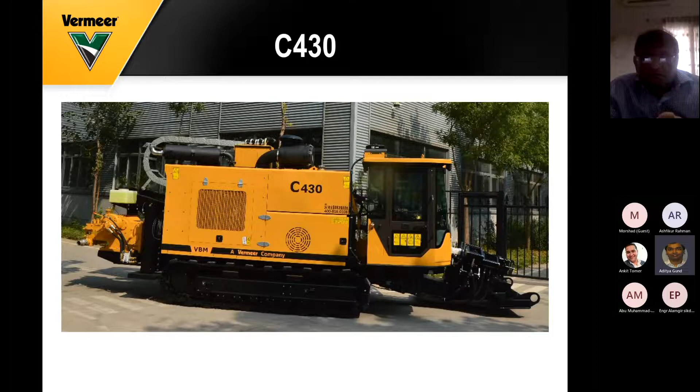In today's webinar, we would be focusing more on a couple of our HDD models which are more suitable for pipeline applications, pipeline projects. One of those is going to be the C430. That's the model we will be looking at first. So this is how the machine looks like.

The markets which can be served with this machine are basically categories up to 300 meters, or even longer than that for short distances like electrical installations, or in old infrastructure in cities in countries like Bangladesh, India, where a lot of old infrastructure is getting updated. This can be used for those projects, or even new infrastructure installation like water projects, gas pipelines, and sewer projects. So this would be an ideal machine for that sort of projects.

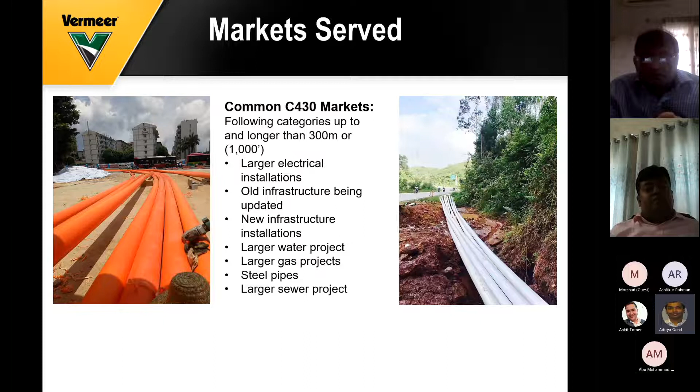If we look at the specifications of the machine, you can see the total length, width, and height of the machine on the screen. The main factors that matter for any machine are maximum thrust and pullback force. For this machine, it will be 43 tons of thrust and pullback, and the torque has 3 speed torque rotation settings.

If you are operating on the low speed shift, then you have 11,400 Newton meter. If it is on medium, 7,600, and if it is high speed shift, then you have 5,741 Newton meter of torque.

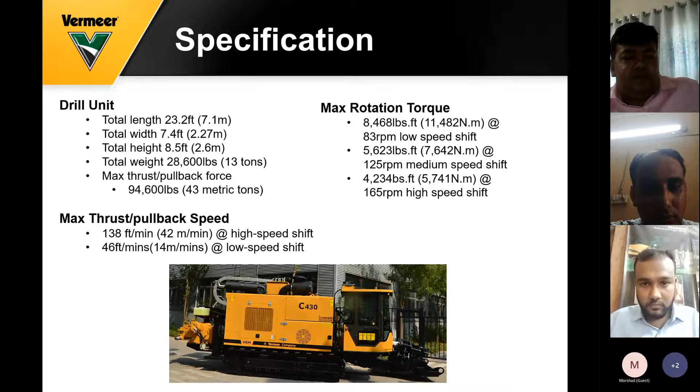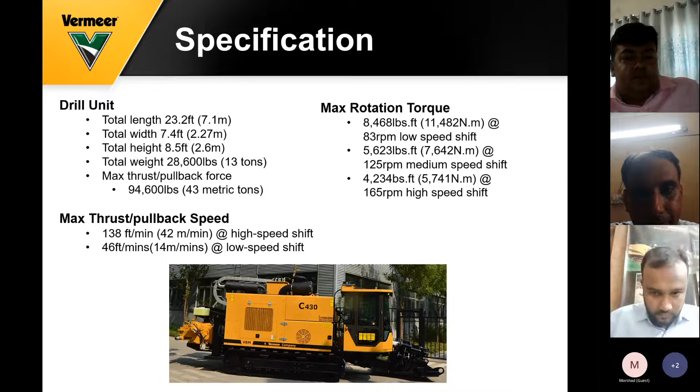And the speed of thrust and pullback is almost 42 meters per minute. That's basically the speed of the carriage which moves from the back end of the machine to the front. It is equipped with a 205 horsepower Cummins engine, and there is an onboard mud pump which you see here on the machine, with two options.

The one you are seeing here is 460 liters per minute. We also have recently launched an option with 650 liters per minute, those are from a brand called LEIKE. And there is a fuel tank of 313 liters, and a hydraulic tank of 460 liters.

In drill rods, there are two sizes that we offer: 73 millimeter and 83 millimeters. We have not sold the 73, but the 83 seems to be a very popular size for drill rods. The length of each drill rod is 3 meters, and we give you a package of machine and 100 rods, so along with the machine, you will have 300 meters total drill rod length.

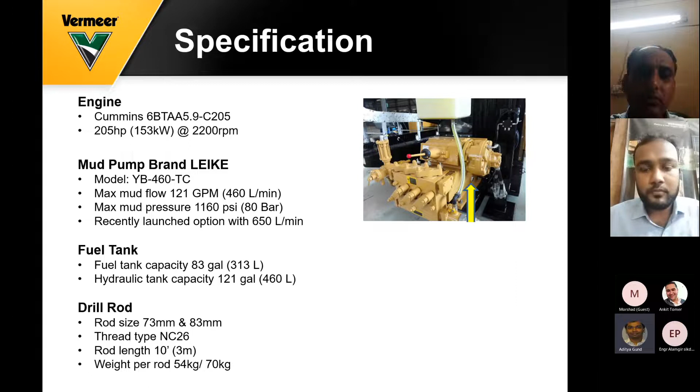The machine is equipped with high performance piston pumps. As compared to our competitor machines, those offer higher reliability. They are designed to operate at a system pressure which is lower than the max rated pressure of hydraulic components in the machine, which basically makes sure that your machine life is much higher.

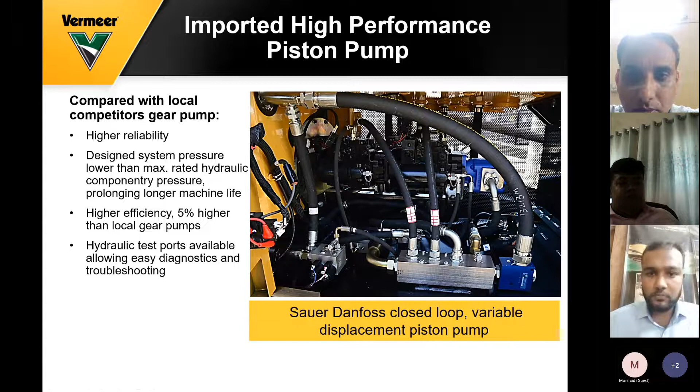They operate at much higher efficiency as compared to the local gear pumps, and there are a lot of hydraulic ports given on there, which basically allows your service crew for any diagnostics and troubleshooting they're doing at the site. As you can see here, these are all Sauer Danfoss branded closed loop system, so that is one of the advantages for C430.

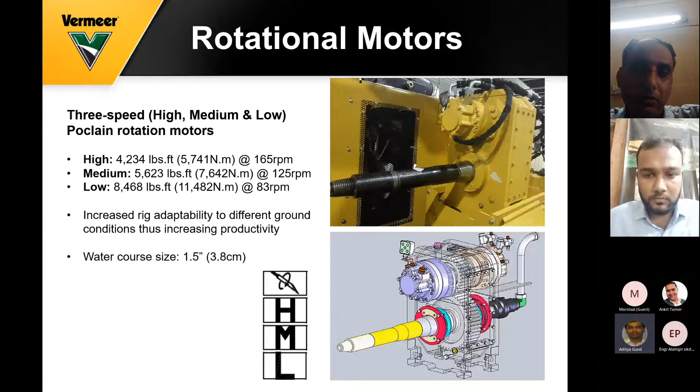The rotation motors are three-speed Poclain rotation motors, and they have three different speeds: high, medium, and low. At different speeds, there is a torque that either increases or decreases depending on the speed at which you're operating. This basically helps your machine have adaptability to different ground conditions. If you're working in harder ground conditions, you operate the motors at slow speed so you get more torque. If it is softer ground conditions, you operate at higher speed since you don't require very high torque. So that's the advantage of having three speed rotation motors.

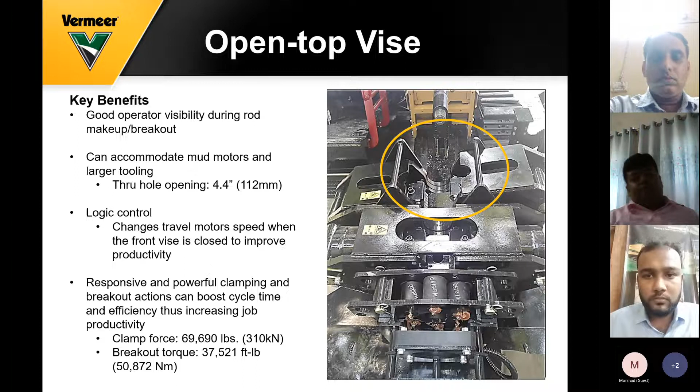The clamping force is much more responsive and powerful as compared to competitor machines as well. So that's basically about the Vise design.

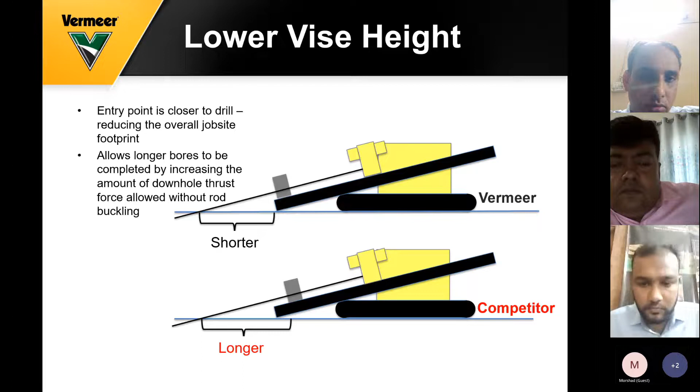One important factor that sets apart C430 from competitor machines is the entry point of the machine is much closer to drill. This angle is much more acute as compared to other competitor machines, which reduces your job site footprint. You are positioning the machine at a much closer distance to your entry pit, so there you are gaining some on the footprint. At the same time, it also allows you to do longer bores by increasing the amount of downhole thrust force as well. So this is one of the advantages of C430 as compared to competitor machines.

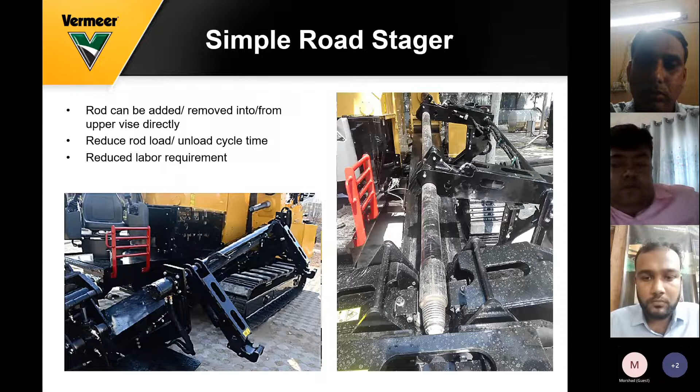The machine has a rod stager option. As you can see on this picture, these are the two arms in which rod can be added or removed from the vise directly. This basically eliminates human interference there, and your loading and unloading of the rod cycle time is much lesser. Obviously your labor requirement is reduced as well.

Ankit, can you allow those people?

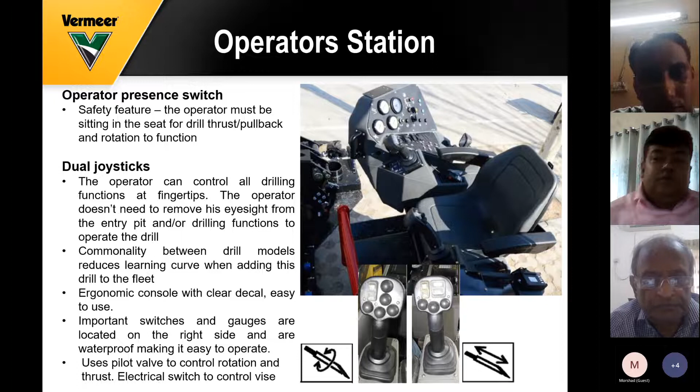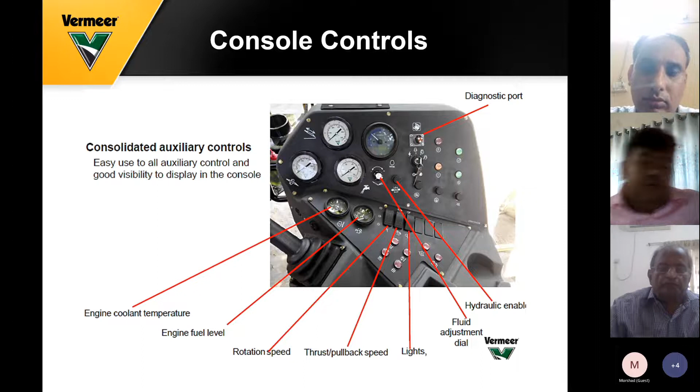That's how the operator station looks like. All the controls are on the right side - machine ignition, all the gauges, thrust and pullback, rotation speed, all the operations of these functions, all the switches, everything is located on the right side of the machine. So the operator can be looking at the drill rods and Vise, and he can also monitor all the functions at the same time. He does not have to look at the left side or anything like that.

Another thing is called the VC tool diagnostic software. We have our own software which basically helps our engineers understand what the problem might be and how to diagnose it.

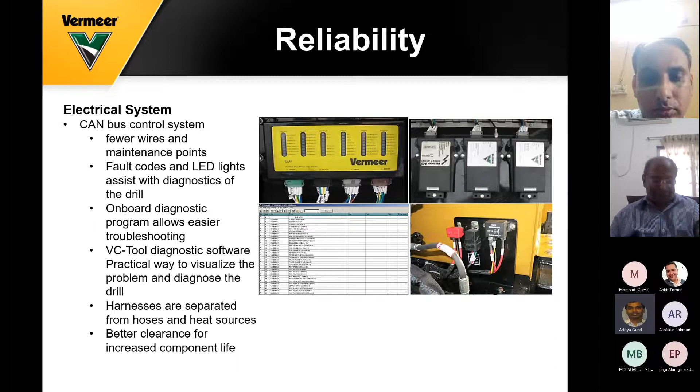And for all the electrical harnesses, we make sure the harness routing is done in such a way that they are separated from hoses and heat sources, so everything is away from the heat sources with better clearance, which increases component life.

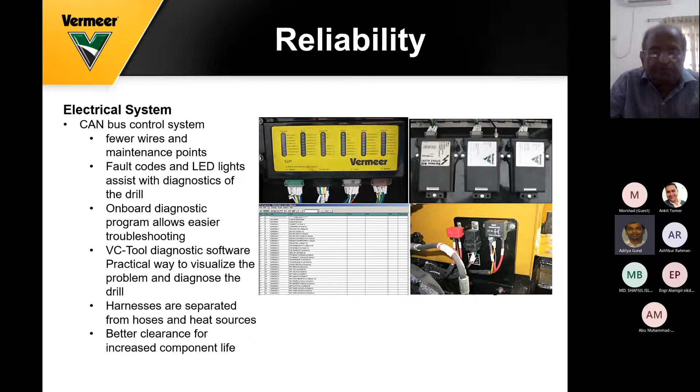Recently we have launched one more feature in the C430 called the plus one control system. It's kind of an upgraded control system with improved reliability and efficiency. It basically allows the machine to process commands faster and allows smoother operation.

A very interesting thing here is there is an option for rock drilling or auto drilling function. These two options were there in our other machines, but C series machines did not have them before. Now they are also equipped with this auto drilling or rock drilling option, which is one more additional advantage compared to our competitor machines.

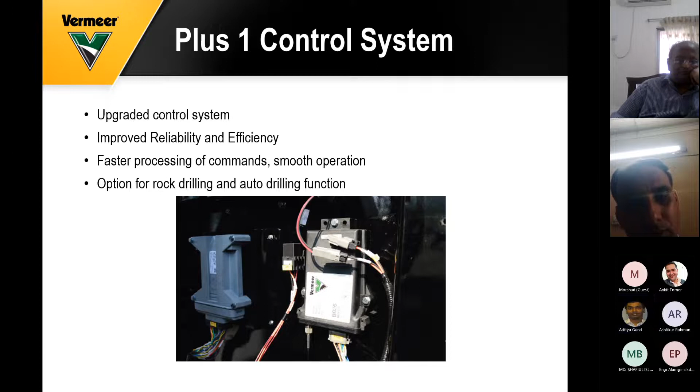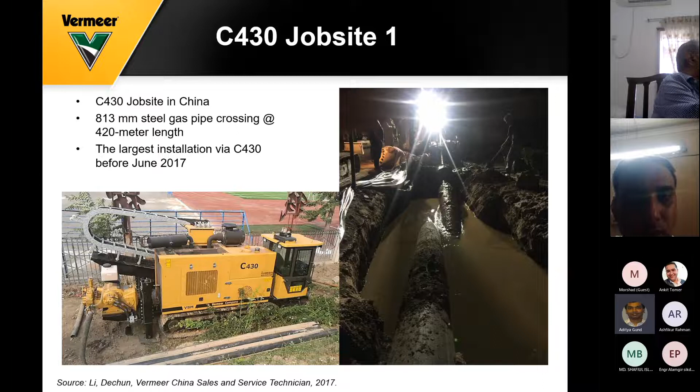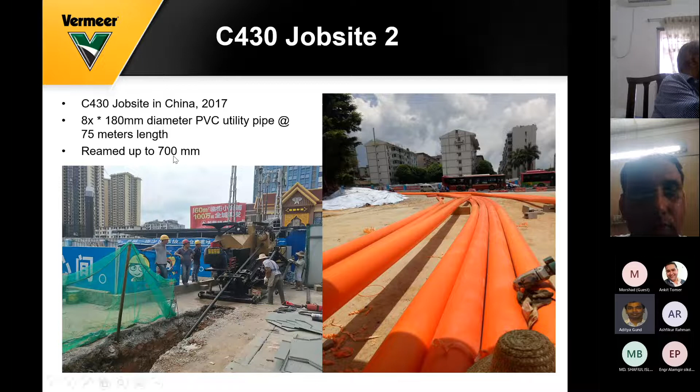There's another one here, again from 2017. They pulled eight different ducts of 180 diameter each. It's a PVC utility pipe, and the length was around 75 meters. So the length was not that high, but the reaming had to be done all the way up to 700, which is almost 30 inches.

From a user experience standpoint, there's a lot of operator comfort, because these pipeline jobs require much longer duration compared to smaller OFC jobs. The operator is actually going to be with the machine, operating it for much longer than on a smaller project. So we made sure the operator is comfortable, and if the operator is comfortable, productivity increases, and thus you make more money because your productivity is going to be much higher.

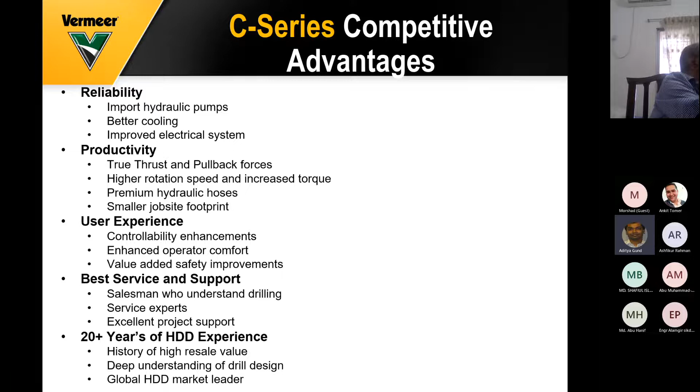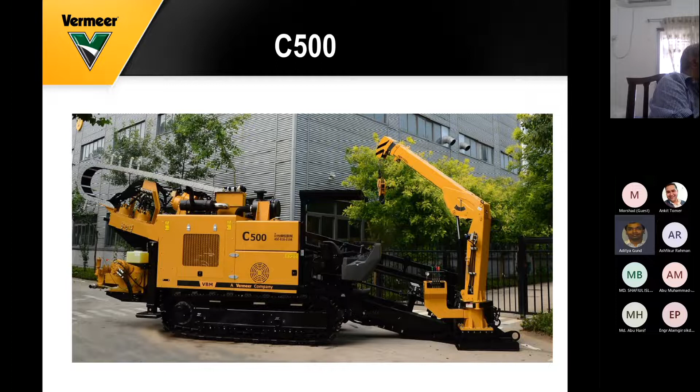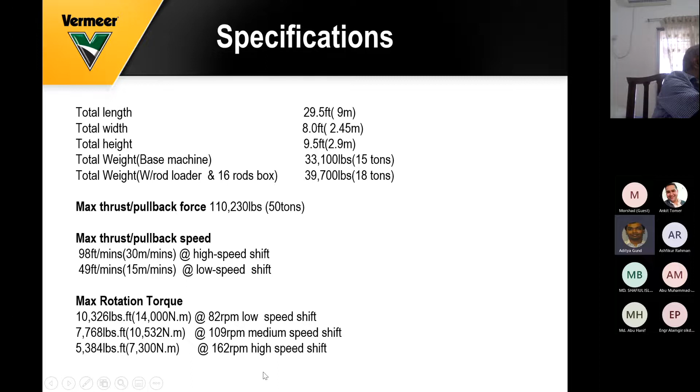Let's go through the specifications of this machine. It's almost 9 meters long, 2.5 meters wide, and 2.9 meters in height. It weighs about 18 tons with the rod box. Thrust and pullback is 50 tons, and carriage speed is around 30 meters per minute at high speed. We use 3-speed rotational motors, so at lower speed you get 14,000 newton meters of torque, and at higher speed 7,300 newton meters of torque.

This comes with a 240 horsepower Cummins engine. We use Cummins engines on all our machines.

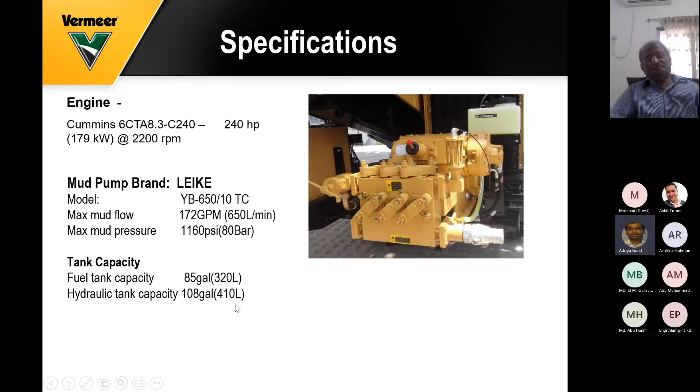This is equipped with an onboard mud pump, 650 liters per minute, 4-gear manually operated. You can choose what gear you want to operate the mud pump at. It has a 320-liter fuel tank capacity and 410 liters of hydraulic tank capacity.

The rods are 89 NC31 thread type, 4.5 meters long. In the C430 there are 3-meter rods, but in the C500 we provide 450 meters of rod with the machine, which comes with 100 rods totaling 450 meters.

This optional crane has a 2-ton capacity, which can be used for lifting rods, reducing your labor a lot.

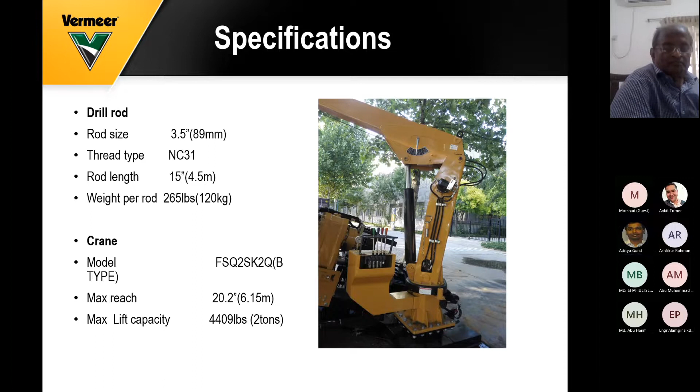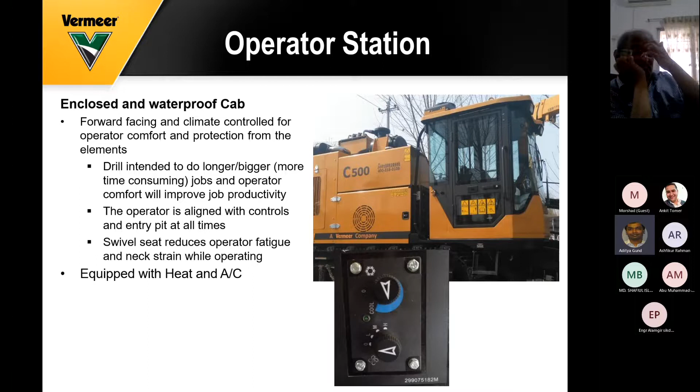This is how the operator station looks. It's forward facing, unlike the C430. The operator faces this side, with a completely glass panel here. The operator sits here with the controls right in front of him.

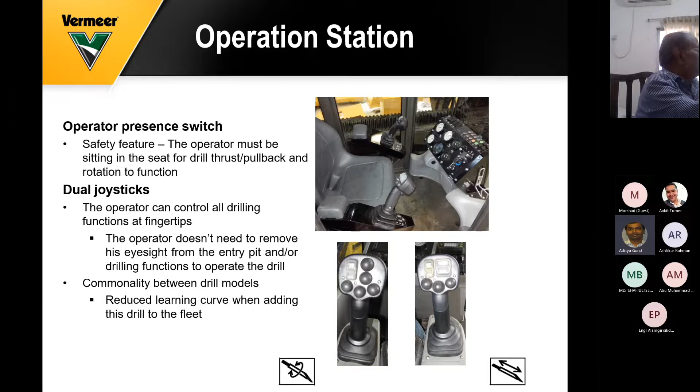These are the two joysticks, similar to the C430. All the controls on the C430 joysticks are also on the C500 joysticks. There is a safety feature on the C500, also present on the C430 and all Vermeer HDD machines, called the operator presence switch. This means the operator has to be seated in the operator station for thrust, pullback, and rotation functions to work. The joysticks allow the operator to control all drilling functions at his fingertips on this machine as well.

This also comes with the open top vise design. I've already mentioned the benefits of that, including much better operator visibility. It can accommodate mud motors up to 127mm diameter. We have been supplying 127mm mud motors with the C500, and we've sold machines in India where those mud motors are working fine with this machine as well.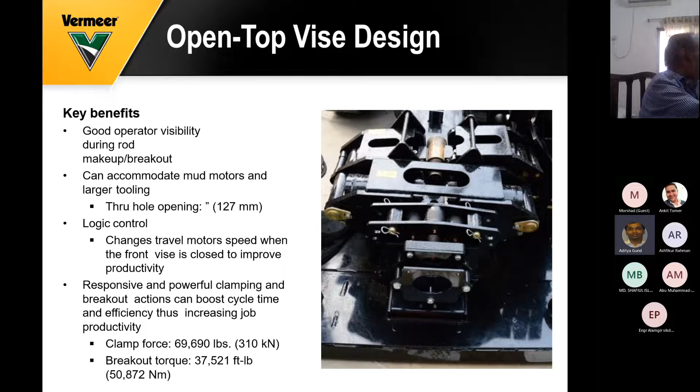This is how the rod loader looks. The machine comes with a rod box that can hold 16 pieces of rods, and the remaining rods have to be kept on the ground. There is a crane that can be used to load the rods into this rod box as well.

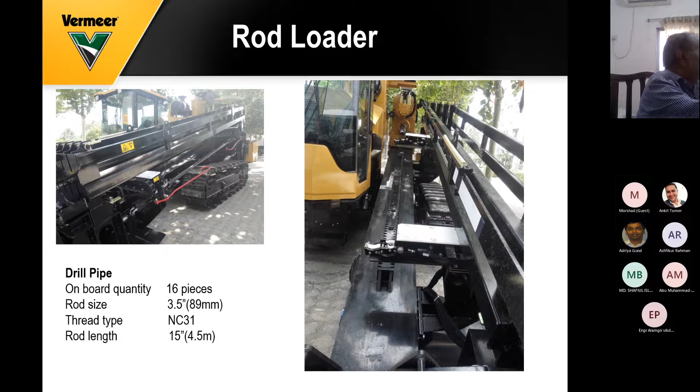The machine, again in this case similar to the C430, is supplied with 3-speed Poclain rotation motors that increase the adaptability of your...

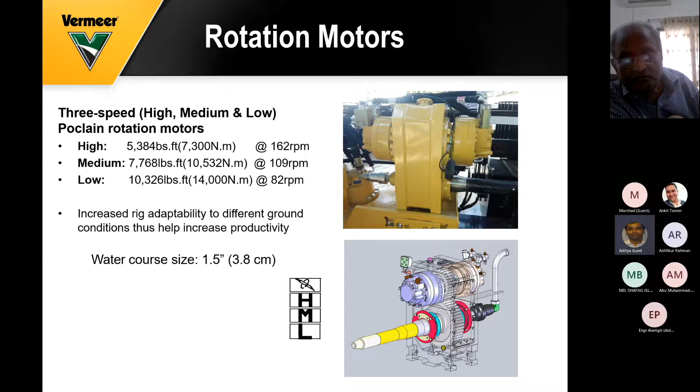That increases the adaptability of the machine to different ground conditions and helps increase your productivity. This is the mud pump, shown much closer here. It's a 650-liter mud pump at 80 bar pressure, delivering a much better flow to run rock reamers as well as mud motors. And like I mentioned earlier, this is a 4-gear manual shift that can be operated manually, allowing you to adjust the flow requirement depending on your choice.

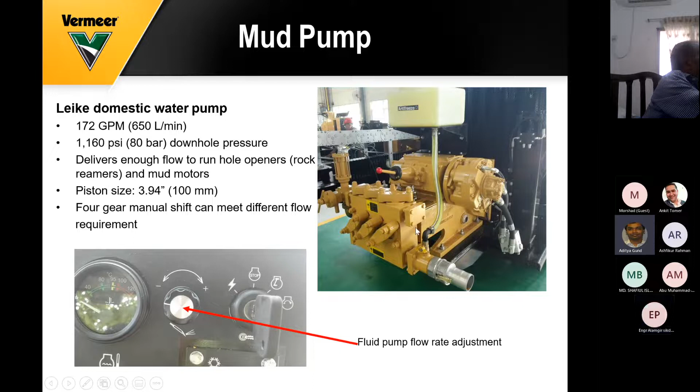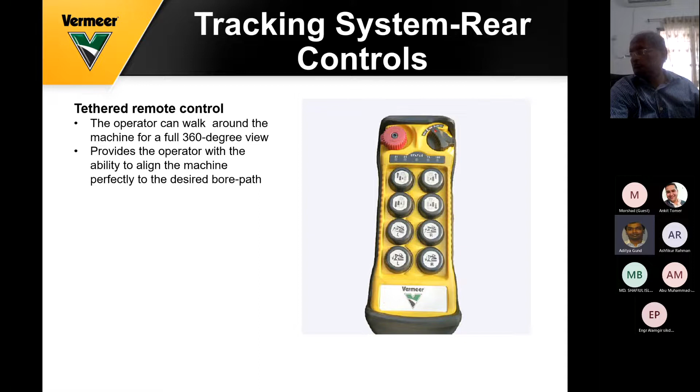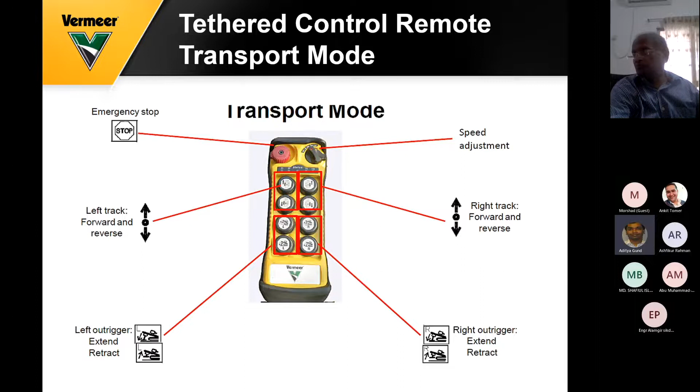The C500 also comes with a remote, similar to the C430. The operator can use this remote to walk around the machine, take a look at it, and position it in case a particular angle or orientation is required. These are the controls you would see on this remote: controls for operating each track and each outrigger, an e-stop, and speed adjustment as well.

Now, I talked about a feature called the operator presence switch, which is a safety feature. When it comes to safety, a lot of people say safety is overrated. We keep hearing that, but is that actually the situation? Because we feel, as Vermeer, as a corporate entity, that safety is the most important part of any construction site, production plant, job site, or HDD site. Unfortunately, it gets overlooked most of the time.

This is a typical safety construction site. Most construction sites lately have started following safety regulations. If not, project owners are making it mandatory for contractors to follow all safety regulations. And the workers on these projects are actually aware of their own safety, so they are demanding the safety regulations be followed. There is still a lot of scope for improvement.

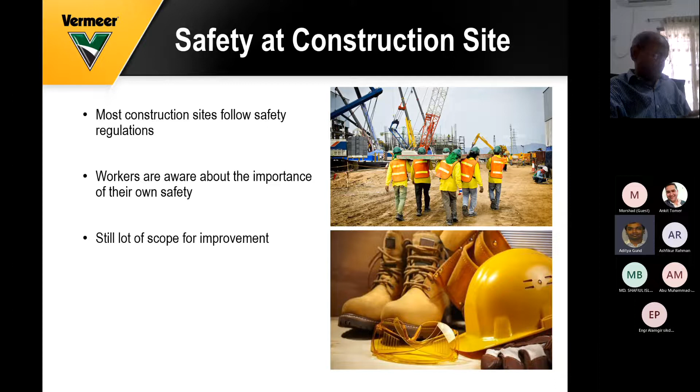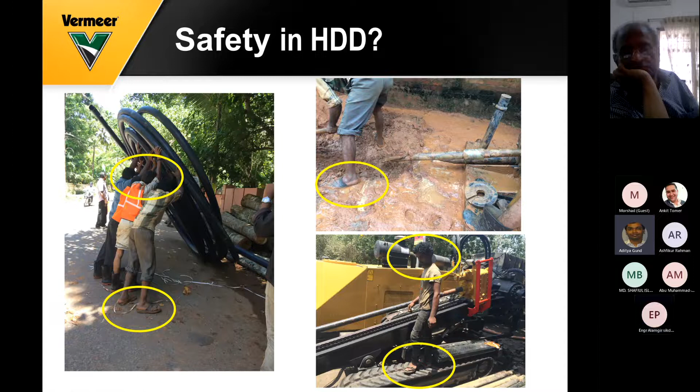One more factor that gets overlooked is mud management. When you're drilling, you're pumping a lot of mud, which includes bentonite, water, and a lot of polymers as well. So when that mud comes back to the ground surface, disposal of that mud is a big question.

We don't know whether disposal of that mud is possible or not. Most of the time, contractors just leave the job sites like that, and they don't really have a good answer to handle this issue. Sometimes in other countries, like the US and Europe, contractors do get penalized for that as well.

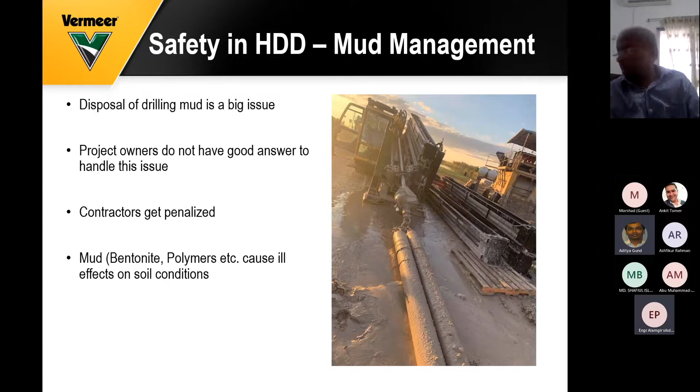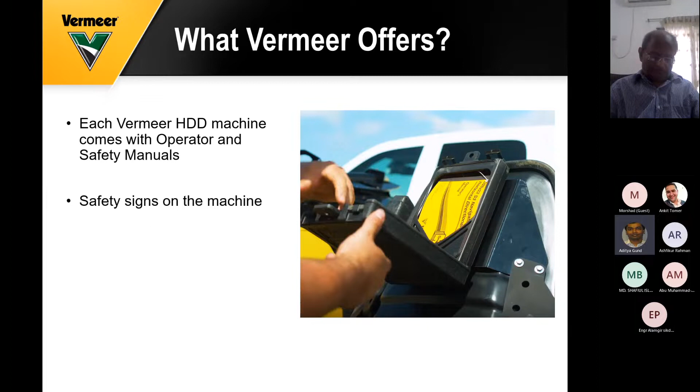So what does Vermeer offer when it comes to safety? All Vermeer machines come with onboard operator and safety manuals. Every Vermeer HDD machine will have these operator and safety manuals, and there are safety signs on the machines.

As you can see here, there is an operator presence switch located right below the operator seat. It prevents the operation, use, or enabling of thrust, pullback, and rotation. These three are the most important functions in any HDD machine. So unless and until the operator is seated in his seat, these three functions will not work.

Whenever you are using a Vermeer machine and starting a new job, or starting your day in the morning, make sure that it is functioning correctly before you start to work.

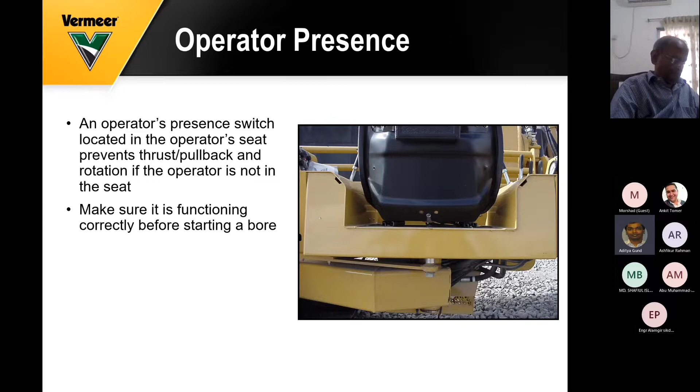Then there is a function called strike alert. All Vermeer machines will have this electrical strike alert. It audibly warns the operator that an electrical strike may have occurred. Now, some of you might feel that we have a feature that basically prevents electrical strikes. In that case, you're thinking wrong. It's not like that — there is no feature, no way to find out whether the machine is going to hit the electrical utility or not.

Unless and until you do the survey, know exactly where the utility is located, and negotiate that while drilling, it's possible to avoid hitting that electrical cable. But if you haven't done that and don't know the location, it's not possible to avoid the electrical strike. If the electrical strike occurs, that electrical current passes through the drill rods, and there is a possibility of your operator dying on the spot. Vermeer has a feature which basically prevents all this from happening — there are two circuit systems.

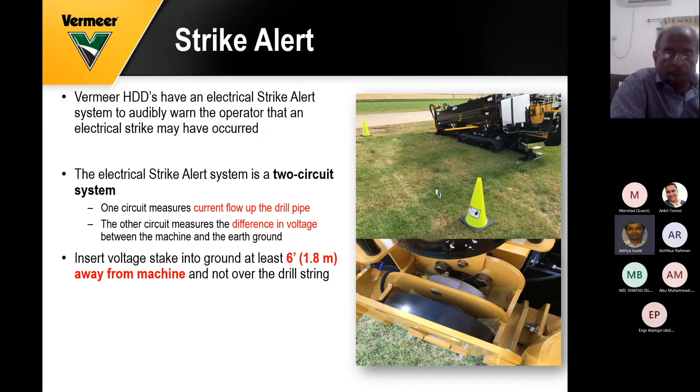One circuit measures the current flow up to the drill pipe. The other measures the difference of voltage between the machine and the earth ground. All Vermeer machines are given a voltage stake along with the machine. You have to make sure you insert that voltage stake at least 1.8 meters away from the machine.

You can see here, this is the electrical stake. You have to insert that in the ground. On the keyboard, there is a testing feature called electrical strike alert testing. You do that testing before you actually start working, to make sure the electrical strike alert system actually works.

This is how your display will look. If it shows a green light, that means the strike alert system is working fine. If it is yellow, the system is not working, and you have to correct that before you start working.

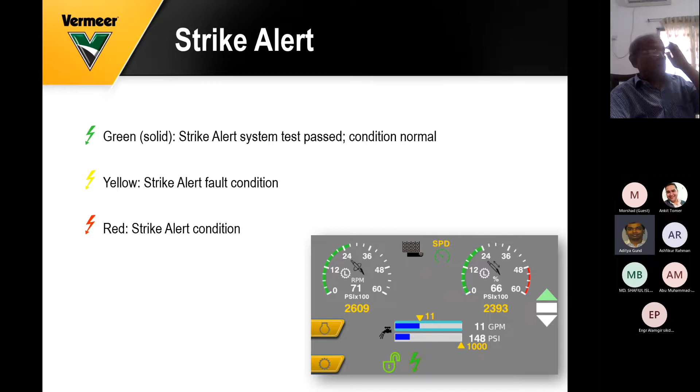When you're working, if there is an electrical strike, you will have an alarm as well as a red symbol showing that something has gone wrong. You have to take proper action and get out of that situation.

Now there is a third safety feature that the Vermeer HDD machine comes with, called remote lockout. Let's say you are working on a pilot hole and have completed it, and your drill rod is out in the exit pit. Now you want to change the drill head and replace it with the reamer, water swivel, or anything like that. So a labor from your crew has to get inside that exit pit and open your drill head, thread in the reamer, and then come out.

In that spur of the moment, if there is a labor in the exit pit and the operator at the seat enables thrust, pullback, or even rotation, that can be life endangering. So the guy entering the exit pit enters with this remote, which allows that crew member the ability to disable three functions: thrust, rotation, and drill fluid flow. Unless and until this person disables the remote lockout, the operator will not be able to enable thrust, rotation, and drill fluid flow.

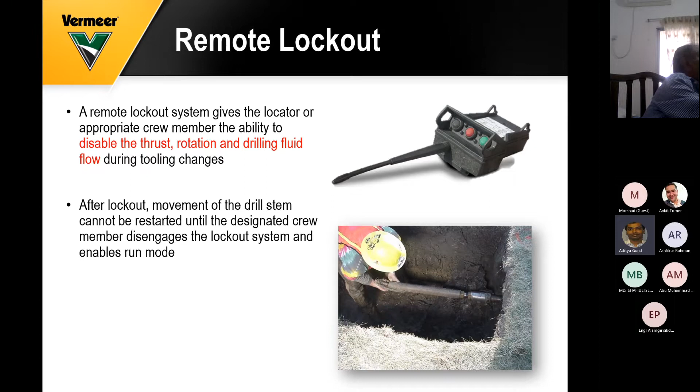This means the guy at the exit pit will be completely safe when he has enabled the remote lockout. Once he comes out of the pit, he will disable the remote lockout, and only then can the operator operate all these functions. So this ensures that the guy inside the pit, if he has enabled remote lockout, is going to be 100% safer.

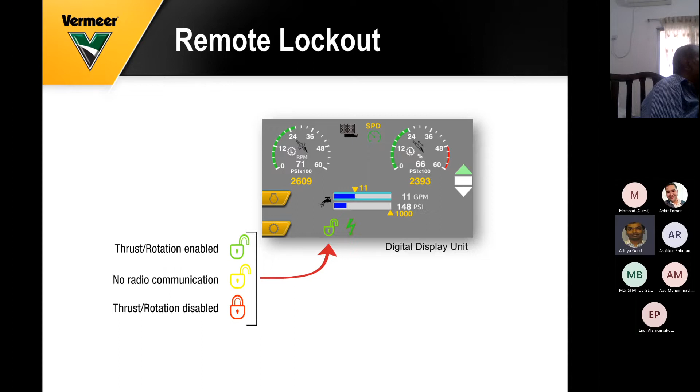So these are the two models which we covered for today's webinar. One was C430, which is a 43-ton machine. One was C500, which is a 50-ton machine. We will soon be coming up with a bigger machine, a 100-ton machine called C1000.

Right now, it is not really ready to be launched in Bangladesh. We are planning to launch it in India very soon. Once it is launched in India, we will launch it in Bangladesh as well. This machine would be suitable for larger pipeline projects where you are working on 24-inch, 32-inch, and 36-inch diameter pipes, with distances of 600, 700, 800 meters long. This machine is capable of handling those projects as well.

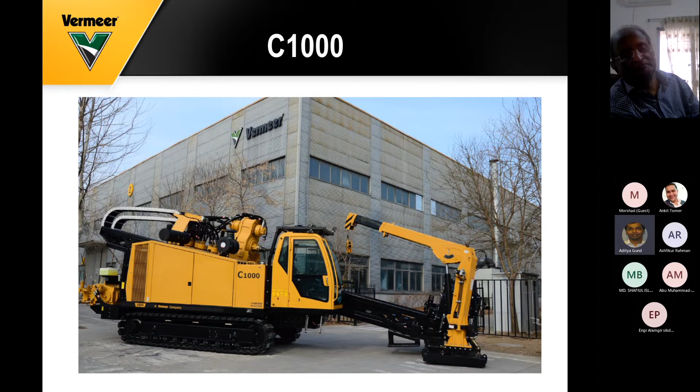So keep waiting, we will definitely send out a notification when we are ready to launch this particular model for the Bangladesh market. And then probably we can have one more webinar on the features and benefits of the C1000 as well. So that's about it.